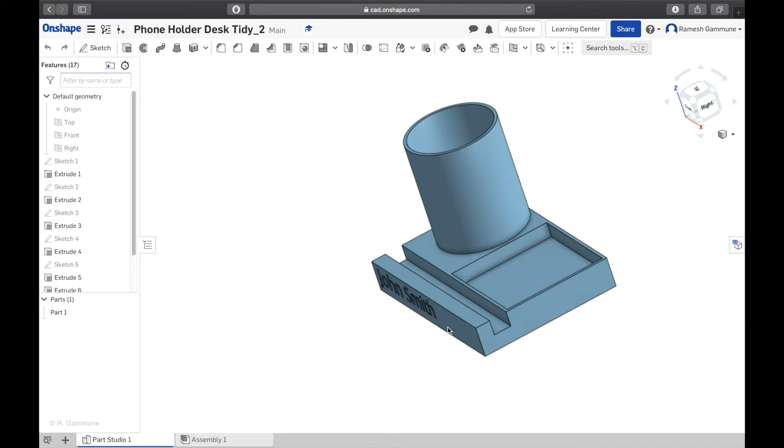So we've finished the phone holder slash tidy thing. You got your name here, and yeah, that's it. So good job. And if you've done it correctly, you should have 7 extrude functions and 6 sketches that are all hidden as well. All right, let's put this into a drawing. Now, just looking at the engineering drawing, I've forgotten to fill this up, but we'll get that sorted as well.

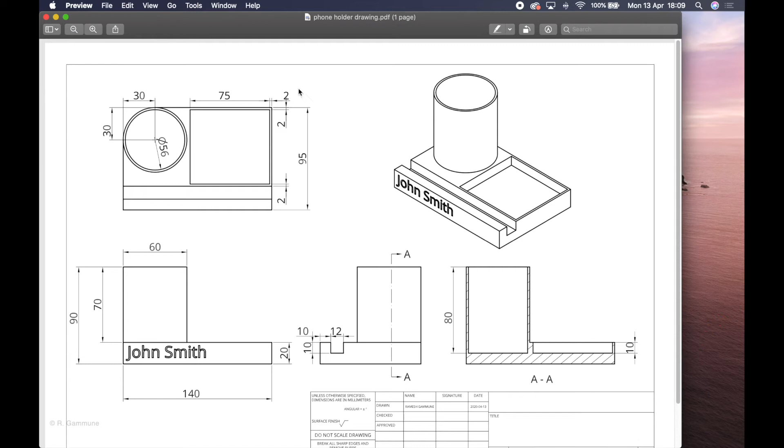Essentially, what we're doing now is this is called a third angle projection, right? So we've got our top, front, and our side views. These are the 3 main views. And then this is a section view showing you what this object would look like if we cut it down from here. And then I've gone ahead and put a 3D isometric view as well, just so you can show the actual object in 3D. Okay.

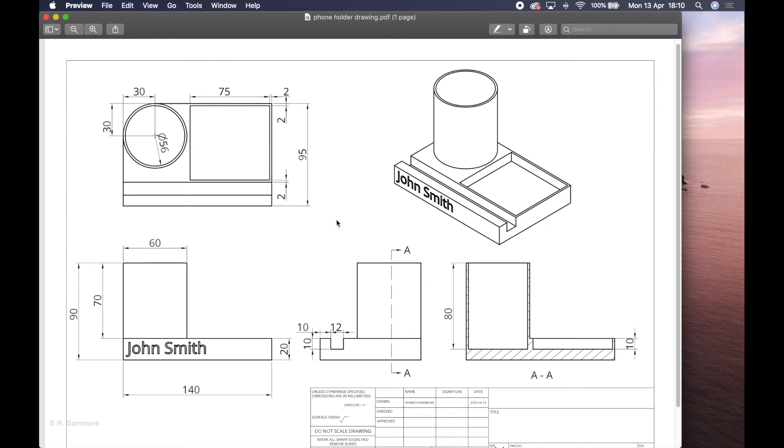And what I want you to pay attention to is how we dimension, like dimensioning conventions. We can see the big overall dimensions on the outside, and then the little ones go inside of it. That's the only place we've had to do that here. Ultimately, the whole idea of an engineering drawing is you should be able to give this to someone and they should be able to make this on a CAD program or by hand using timber or plastic or metal. All right, let's get on with it.

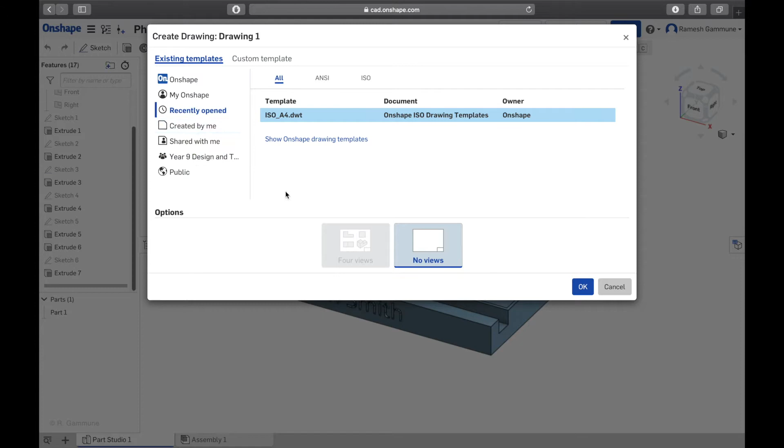Okay, so to do this, we need to open up a drawing, right? The best way to do this, well, the only way I've known so far on this software, is to go to this little plus icon on the bottom that says Insert New Element, click it, and click on Create Drawing. Once you click that, it'll take you to this page. I'm going to show you how to make a custom template, so don't worry about these. Click on Custom Template up here.

We want to go third angle, right? English A4 is good because we can print it off at home. Units are in millimeters, decimal separated by a period. Border, you can just go include or do not include. I'm going to go do not include. Yep, and go ahead and click OK.

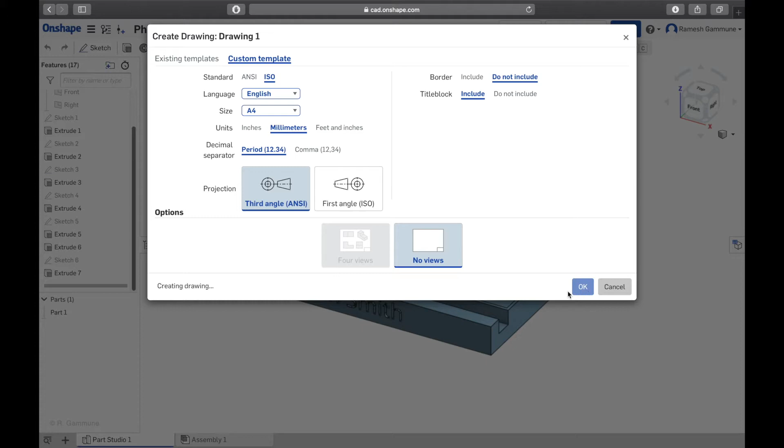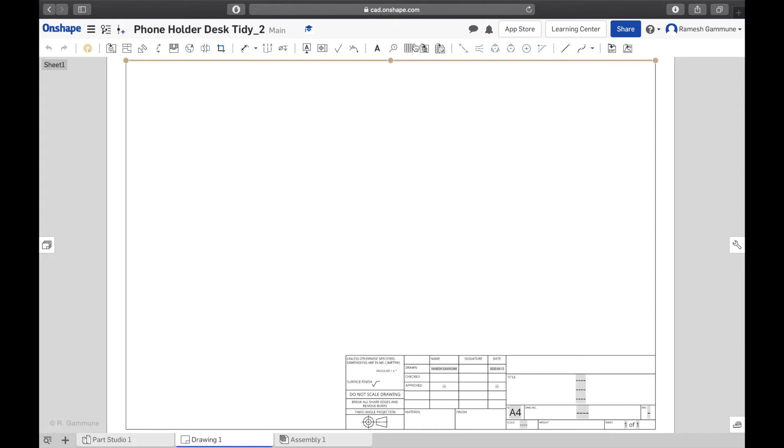All right, so this is the drawing page. This is what opens up. First of all, I want you to get out of this select part or assembly box and hit this red cross over here as well. We'll talk about how to get into those menus. So if you look at it, the navigation is pretty similar to the 3D space. By the way, if you need your 3D space, it's down here. Click on Part Studio, it'll take you here. Drawing is right next to it.

On the top, we've got our modifiers again. So this is to insert a view, that's the projected view, that's our section drawing view, etc. Dimensioning, the very same, but when you dimension on the drawing, it doesn't actually change the model. It shows you the dimension of the actual model we built, right? We can add text, you can add a grid, tables, whatever, okay? And I'll show you how to do that.

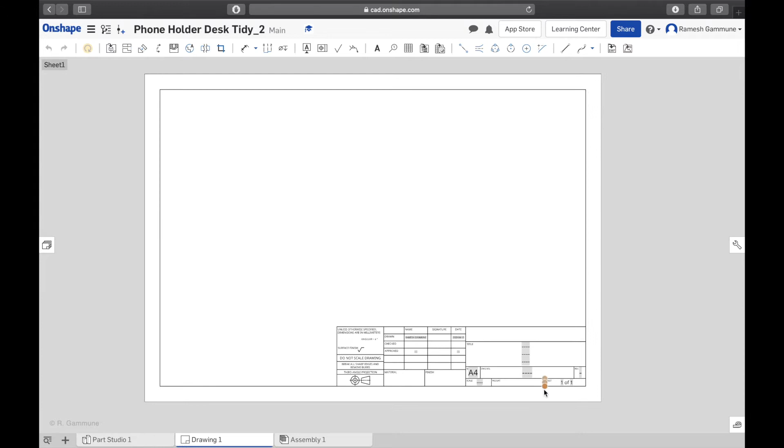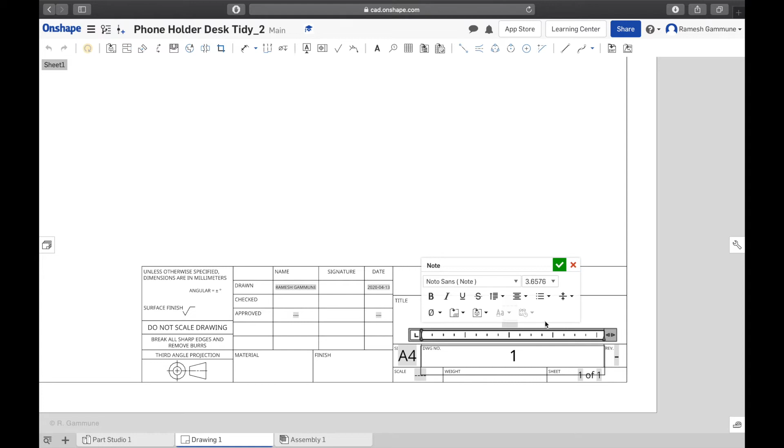Before we do anything, I like to start off by just putting a title here. So get on that, click it, delete that, double click, backspace, and that's drawing number 1 because we only have one drawing. Click the tick, double click that, and we can name this phone holder desk tidy. Okay, it's a long name, but it fits.

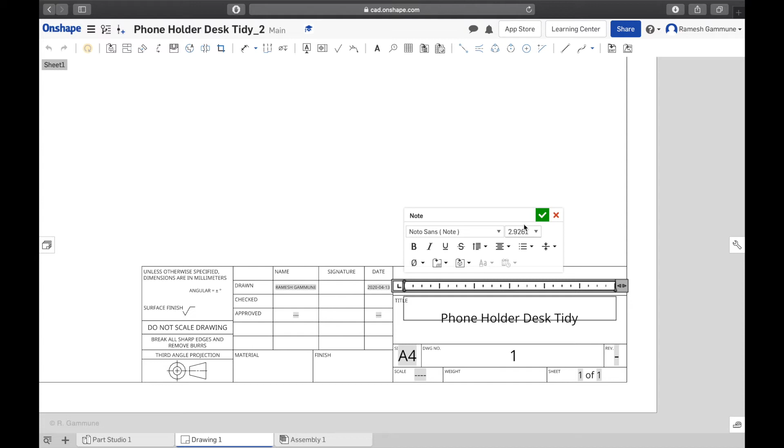And then this one over here, we don't want that showing like that. Let me get rid of that as well. Okay, there you go. Your title block is mostly done. We can fill that up if you want to, but I'm not too fussed about it right now.

All right, so let's insert our model here. So for that, we need to go to Insert View, click that. Now, the first thing you need to do is you need to pick the scale. We want this to be half the size so it fits on this page, so we're going 1 to 2. If we go 1 to 1, that is actual size.

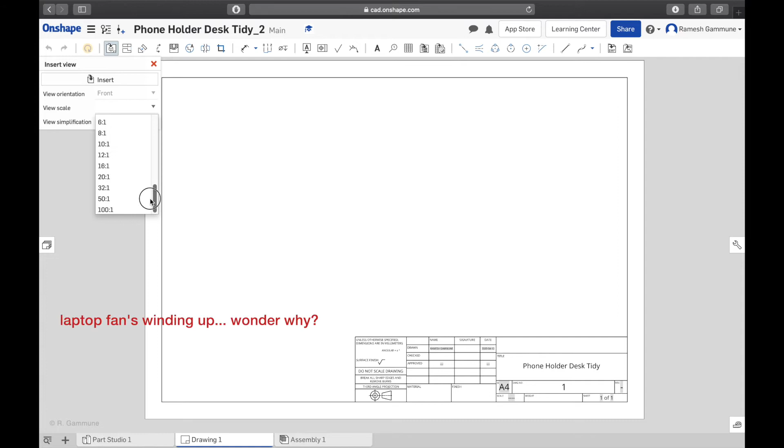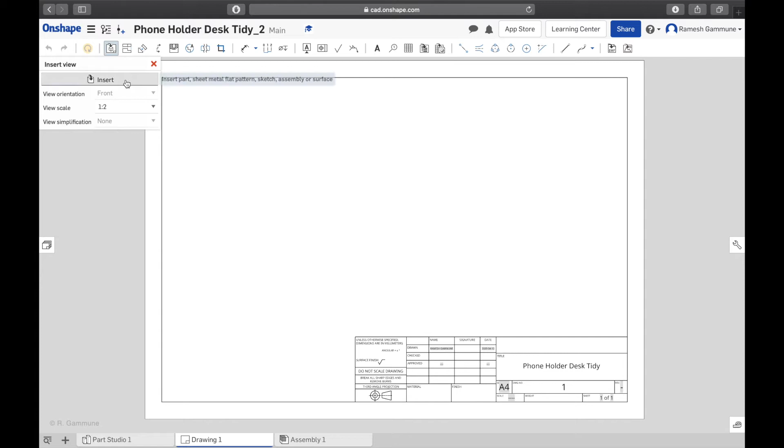1 to 2 is half the size, 1 to 3 is a third. You get what I mean, all right? If you're doing something really small, you can do 2 to 1, 3 to 1, essentially the opposite, okay? But we are going to use the 1 to 2 scale. Right, and click insert. That'll bring up this menu here.

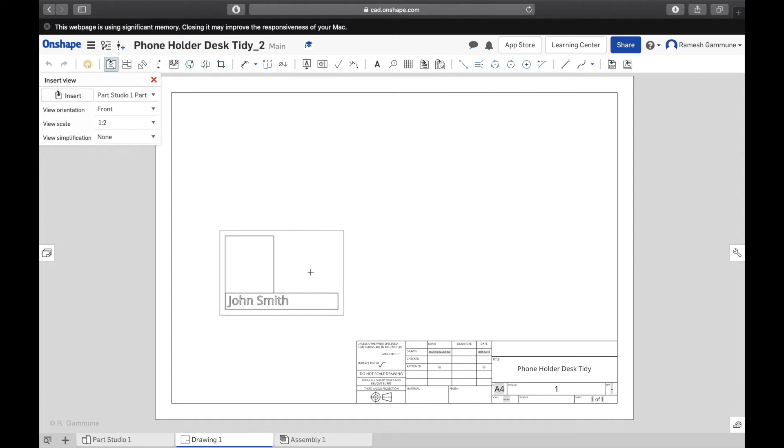We need to go to Part Studio 1 Part, because it is one part that we're doing. And click that. Then we'll have this, give it a second, it gets a bit slow in the drawings. I haven't figured out why yet. We have this drawing over here, just a front view. You'd notice that it is pretty laggy. Okay, so just bear with the software a bit.

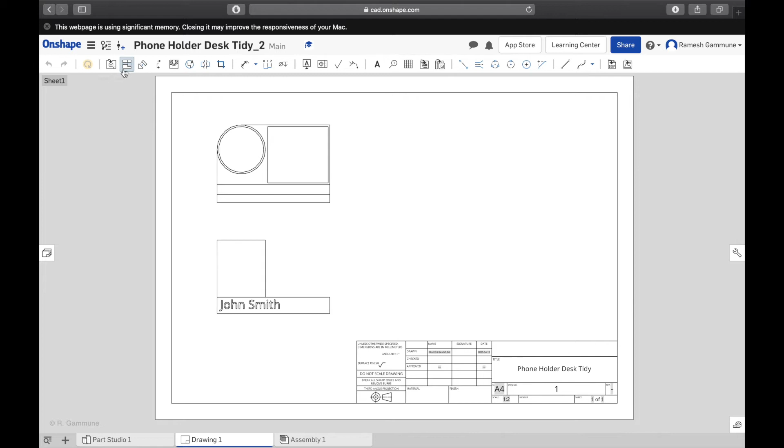Click that, click and let go, and then you get this other view. Place either the side or the top, whichever one you prefer. I'm going to go with the top, and then it'll get out of that, and you'd notice that it automatically changes the function to projected view. Right, so what I'm going to go and do now is click on our front view, let go, and drag out the side view from there. Okay, then we hit escape.

Now we're going to go ahead and dimension the main drawings first. Okay, follow what I do, and we'll try to keep it looking reasonably neat. Right, what I like to do is I like to get my main height and width on the front drawing and the depth on the top view. Okay, and you'll see what I mean. Now, just like in the 3D space, we're going to hit dimension. Okay, so click, make it about that long.

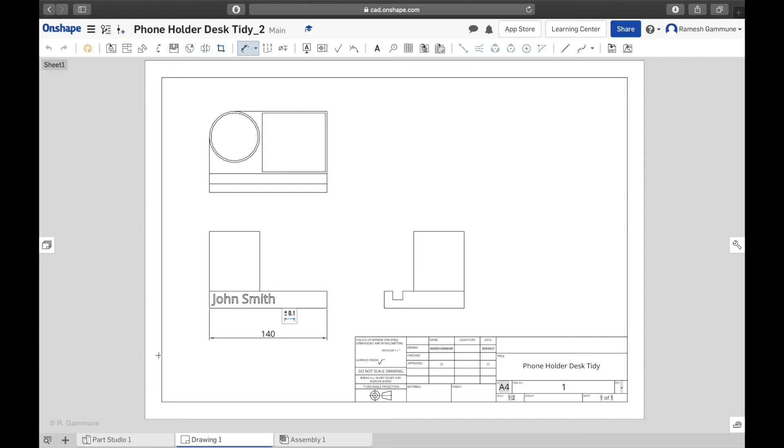Right, there you go. Next one, you notice that if we go and try to just do this part, it's not giving you that whole length. Okay, we want the overall dimension, so I'm going to go from this top point and the bottom point, and that'll give us 90. Okay, pull that out a fair bit because this inside dimension needs to go on the inside of that. 70, right? And we can give this side dimension here as well, 20.

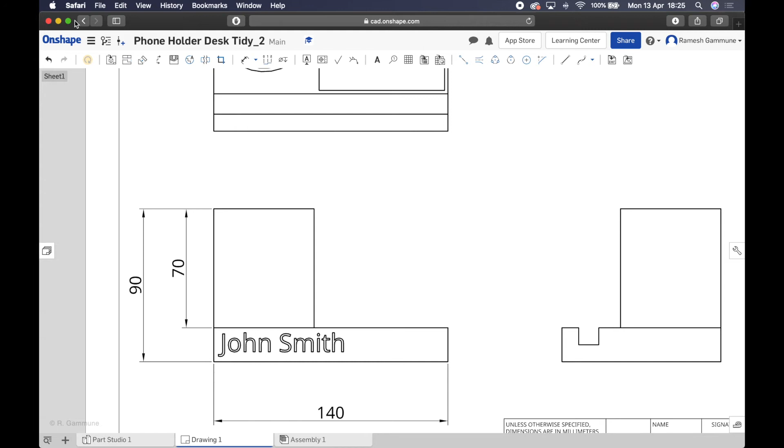Okay, or you can have the side on this side. Actually, let's put it on that side. Click that again, and there we go. Just on that side. So that's that front view done. Okay, let's go ahead and move on to the top view. So I can just manipulate that like so. We don't need to do the overall length anymore, but we do need to do the overall depth.

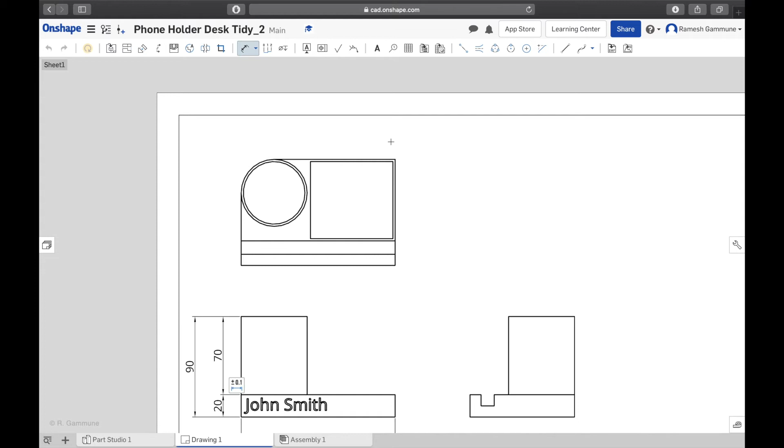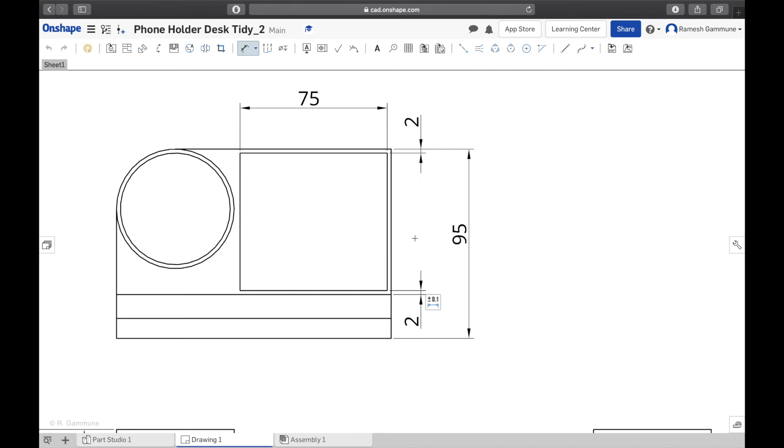Okay, so again, like I showed you before, it won't let us select this whole line, so we're going to go from point to point. That's a 95 mil thing. Give it a bit of space. And the next thing we want to do is define this inside box. 75. Don't worry about this space here, because remember when we did draw that box, we went on the offset amount of 2 mil. 2 mil here. And then we also did 2 mil here.

There you go. That's good enough for that part. Now the interesting part is with the circles. Now you notice that with the circles we can't really see the center point here. Okay, so we need to first of all put the center there so we can show them, or whoever's looking at this drawing, that the center point of that circle is 30 millimeters from each edge, right?

So for that, I'm going to go up here to the center mark, click that, and then click either one of these circles, it doesn't really matter, and you'd see that that center point forms up there. Right, so if you hit escape, there we go. Stop.

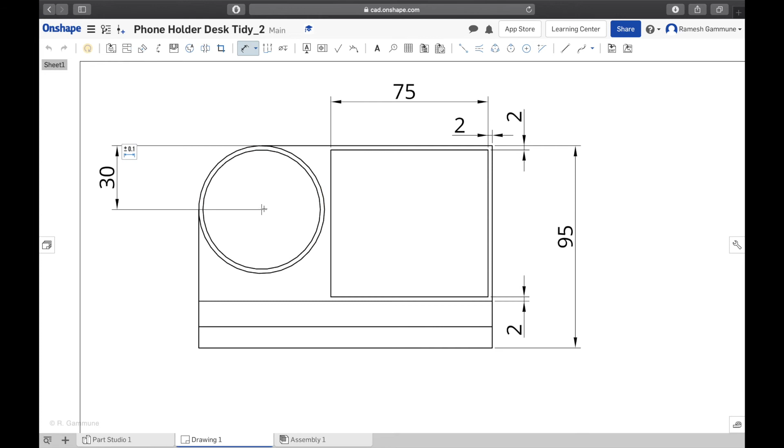Right, and the next thing is to dimension this. So I'm going to dimension the center point to the ends first. It's 30 out that way. The center point to the end, and 30 up here as well. Okay. And I'm only going to dimension the inner circle. I'll tell you why in a second.

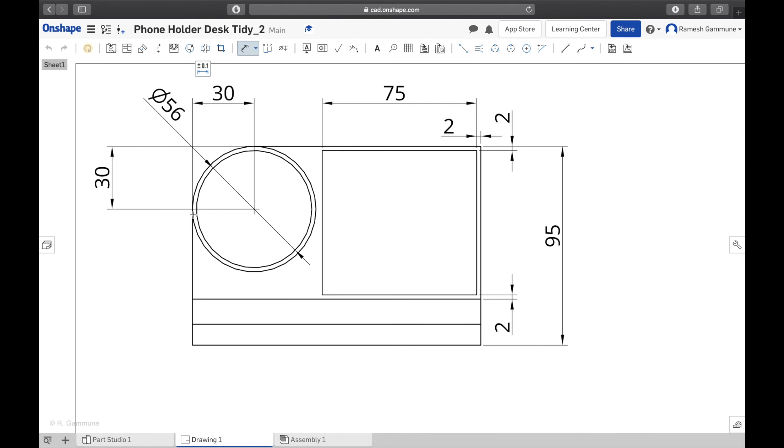Okay, it's 56 millimeters there. Because if I try to do another dimension, it's going to be quite messy, right? So I am going to just put that outside diameter on the front view. Ooh, wrong, escape. There we go, 60. Right, that's that so far. Now we're going to move on to the side view.

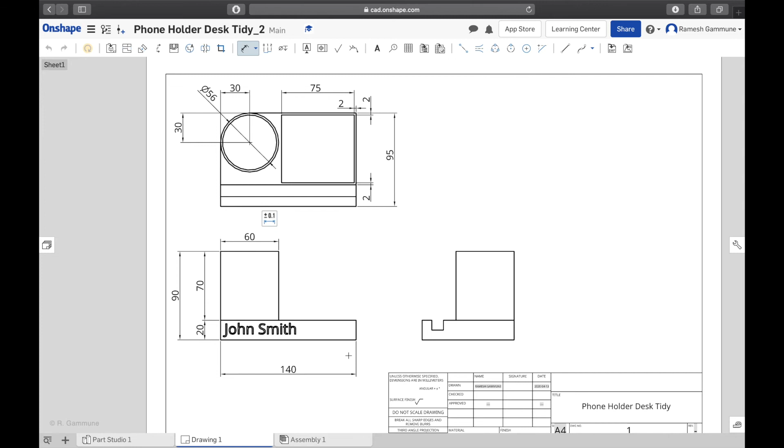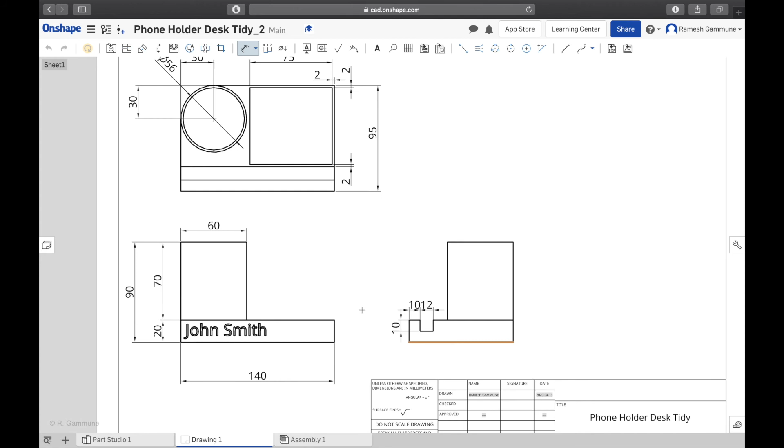Okay, in the side view we are just going to dimension our groove for the phone. Okay, first thing, right, that's 10 mil. That's 12. Then we need to know the depth. It's 10 as well. Right, so that's the side done. So that's most of our main dimensioning done, but we still need to show how deep the cuts are here. And the only way to do that is by cutting this open and putting that joint next to it over here.

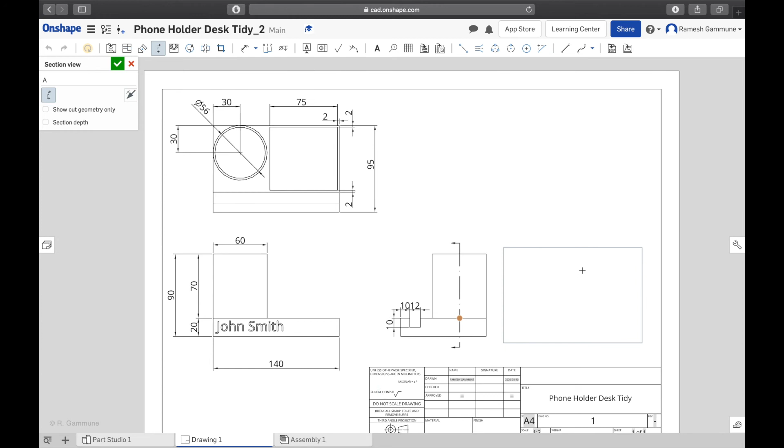To do that, we go to the section view. We're cutting it this way, so we're going vertical, and place that line around the middle there. Right. And we want the drawing to be here. Go ahead and click it. And now we've got a section view here. Right, and you'll see it says A to A, which means we're looking at it from here to there, and that's our section view. I'm going to go ahead and dimension that.

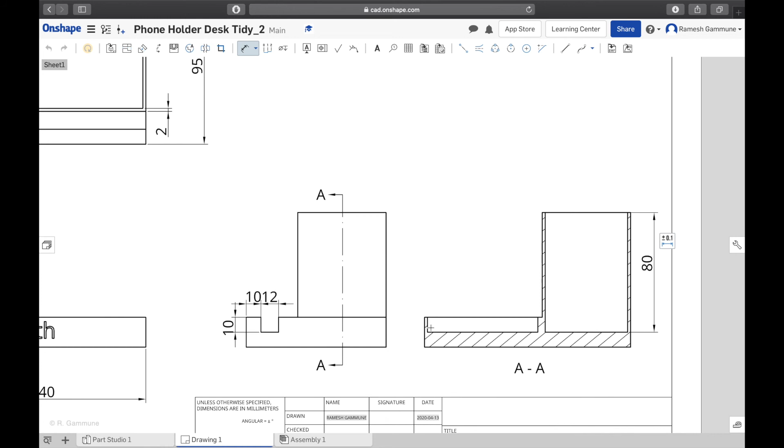So that depth is 80 mil. And that depth is 10. Right. Get out of the dimension tool. One last thing, if you want to do this, let's get this out into an isometric 3D view. Best way to do that is go back to projected view, click, right?

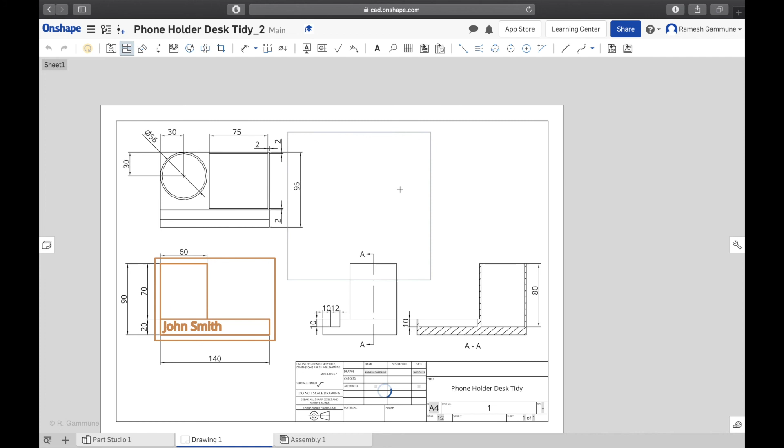You see, if you go straight up, it's going to give us a top view. If you go to the left, it'll give us a left view. Right, it'll give us a right view. But if you go diagonally, you go a bit bigger, and you click, there we go. And get out of the projected view, by the way, it'll give you the 3D view. Alright guys, and that's it for drawings.

Now, to submit this, you can't submit this, you have to, on Mazcom, put in a PDF. So the way to do that is right click on drawing and click export, and file name, Desk Tidy drawing, format PDF, text normal black and white, and just hit option to download,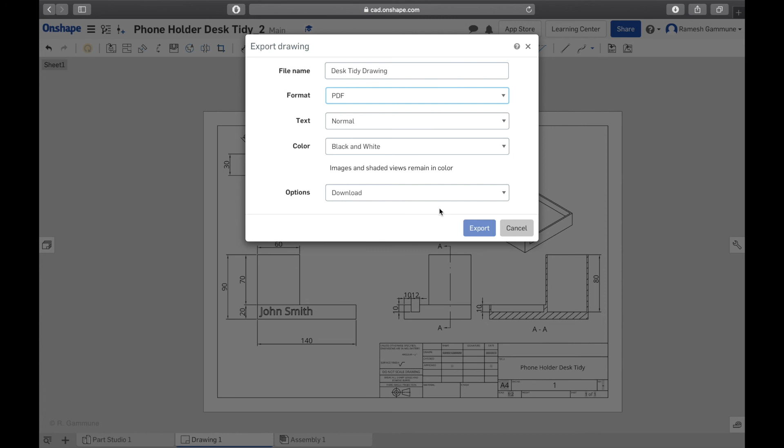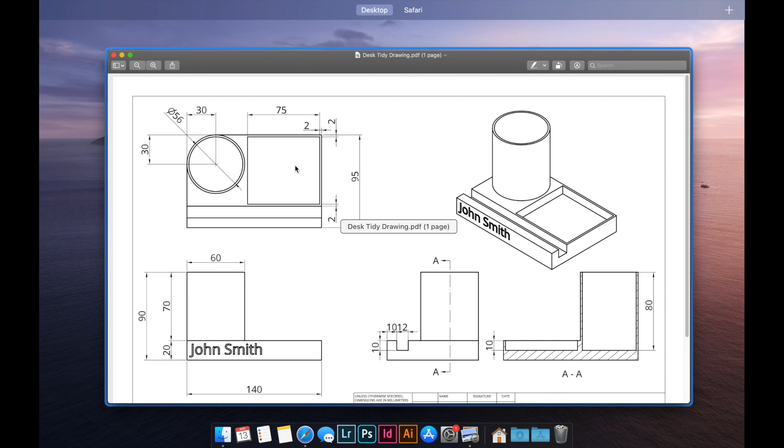and you get this message saying that it's being prepared for export. If you click on the bell, it'll tell you what's happening here. It's exporting the element. Right, and when that's done, it'll send a message to you, and here it is. It's just opened up in my downloads folder. Make sure it's the correct one. Phone holder, Desk Tidy, scale 1 to 2. Forgot to tell you that the scale will auto populate once you pick the scale up there.